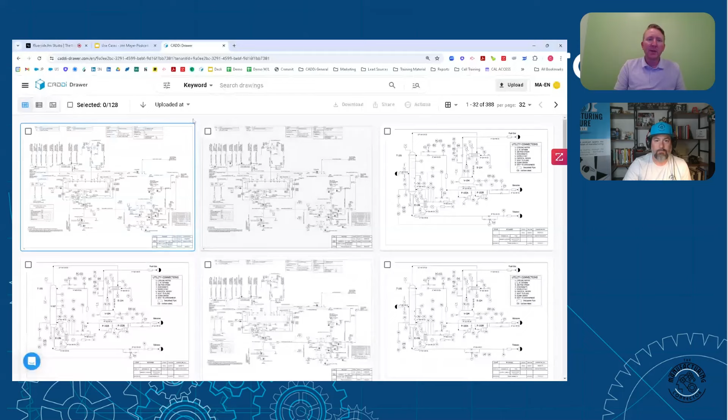First, I'm going to share my screen and go over to the CADDi Drawer application. This is what I mean by logging in and instantly seeing the parts you have designed, and the fact that we're really oriented around thumbnail views of the parts themselves. You see the shape instantly, right?

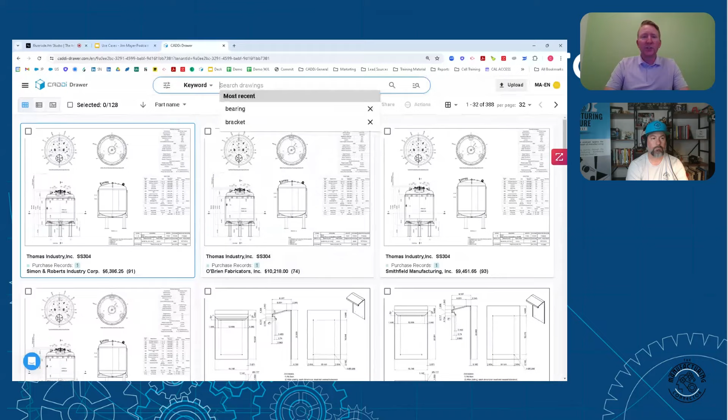First, I want to walk you through that keyword search I talked about. Let's just start searching for some keywords here. We're going to search 'bearing,' right? If you're lucky enough to have a PLM or PDM tool, a PDM tool could have found this part for you really quick. The part name is bearing, right?

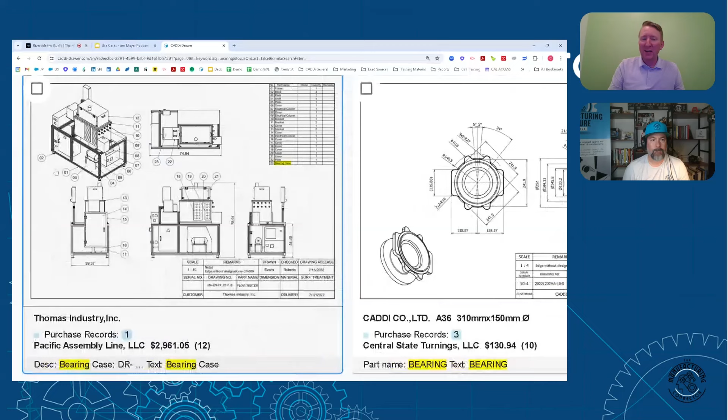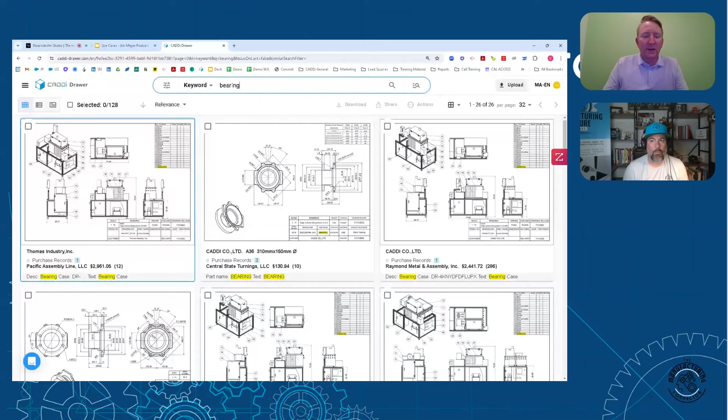But what it wouldn't have found is this assembly drawing — the bearing isn't described here at all, it's in the bill of materials. So now, wait a minute, part number XYZ from our suppliers is about to go end of life. I need to find that part number scattered throughout all our data in order to start replacing those parts across our assemblies before this product goes end of life.

We can even narrow that down further when we start tying these searches together. So we're looking for a bearing made out of A36 steel. Boom, now we've got three of them here, and look at those shapes. Wait a minute, this one in the middle of the screen is roughly what I'm about to start designing here. Does this work for me instead, right?

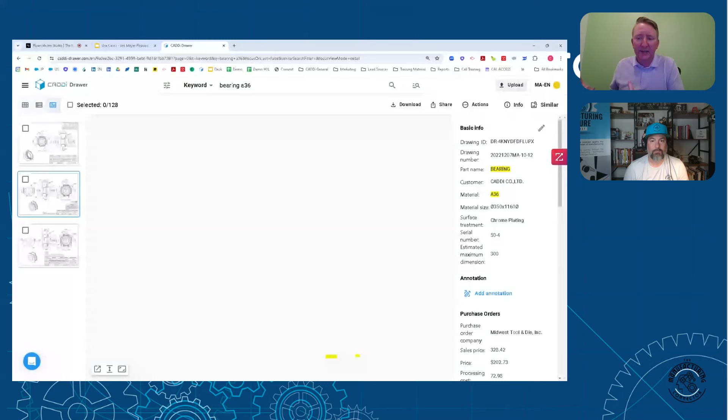That's one of those ways engineers use that tool — they're going in and searching for information that can be right at their fingertips rather than locked away in cabinets. We start looking at a bracket, for example, and our boss just walked by and said, hey, we've got too many different brackets on the shelf, go figure out which ones we can combine into a single part.

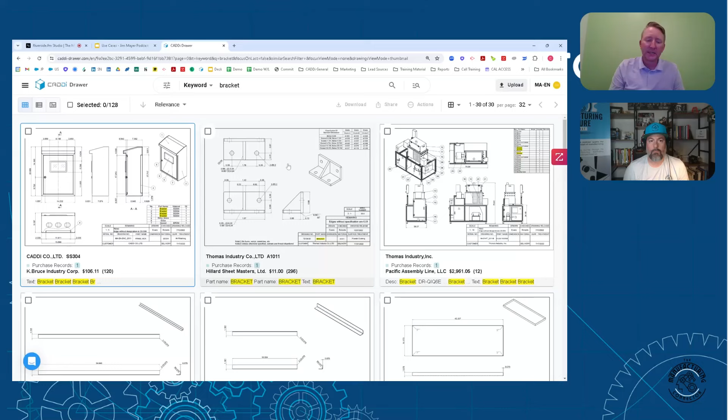So they'll go into the system and they'll find a bracket like the one we have here in the middle of the screen, and they'll go ahead and select it. This is where our similarity search tool comes in, in the upper right-hand corner. They click on that similar button, and within seconds it pulls forward all of those shapes that, based on the geometry inside of the part, are similar.

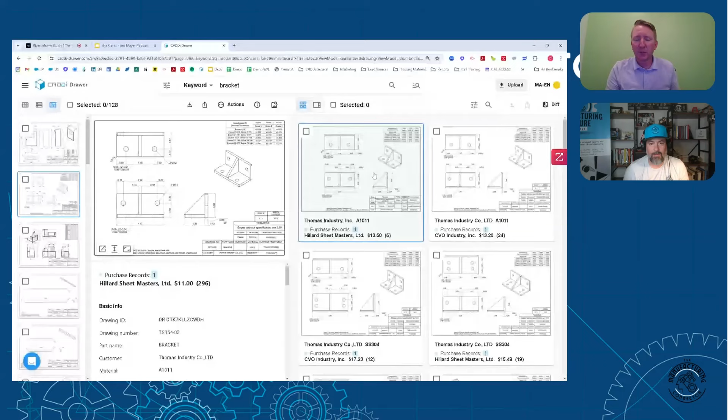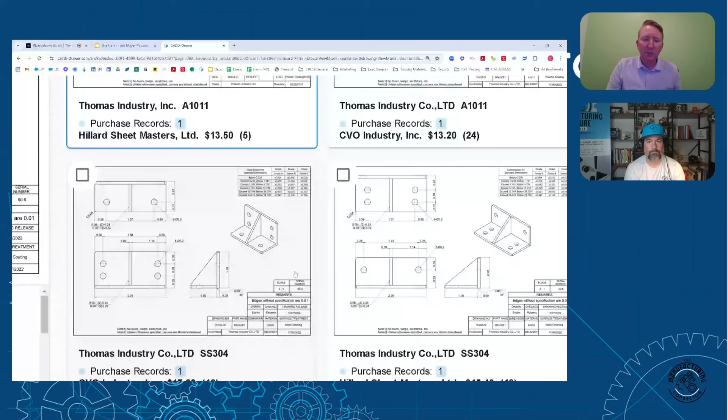They start thinking, wait a minute, these parts here, there's not much of a difference. Maybe little differences in where the holes are, a couple extra holes in this part, a couple extra holes in that part. They quickly realize, I'm going to go ahead and redesign the part to accommodate all of those mounting locations rather than these one-off mounting locations. I'll get 5 or 6 part numbers out of our system, stop taking up shelf space in our inventory room, and now purchasers can negotiate for 500 of this bracket per year rather than 100 of each of the 5 brackets before.

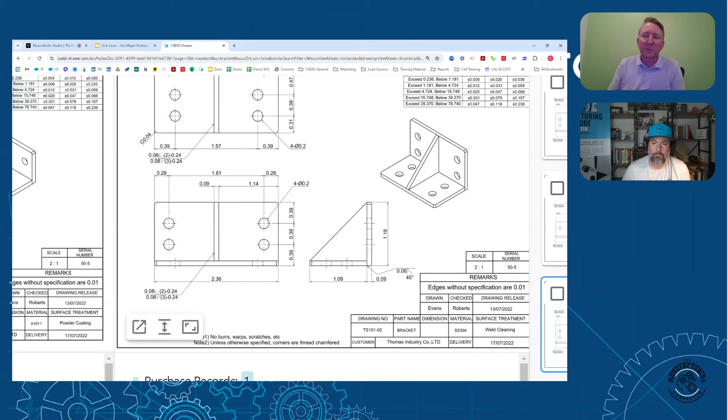And that should absolutely help save our organization money as well. So I hope that makes sense in regards to some of those engineering use cases.

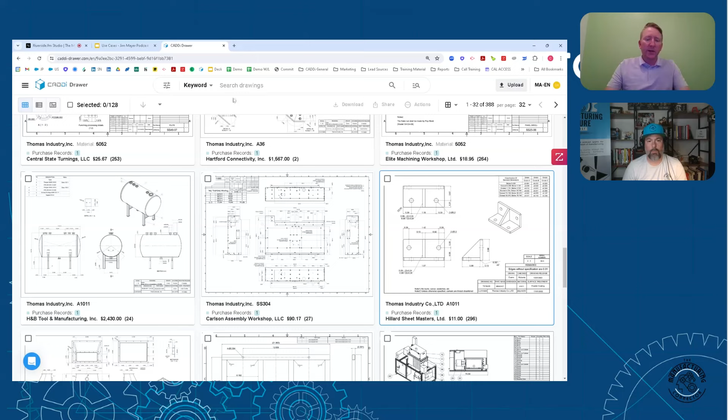I want to walk through for just a second a little bit of an advanced procurement use case here as well, using the same parts. So we're going to go ahead and search for that bearing again, and we're going to select this bearing in the middle of the screen.

If the audience can pretend with me for a second, the engineering team just walked over to my desk. I'm a buyer who's been in my role for just 2 weeks now, green behind the ears. I'm ready to tackle the world, but I don't know anything about our vendors at all, who performs well at what, and who doesn't perform well at other things.

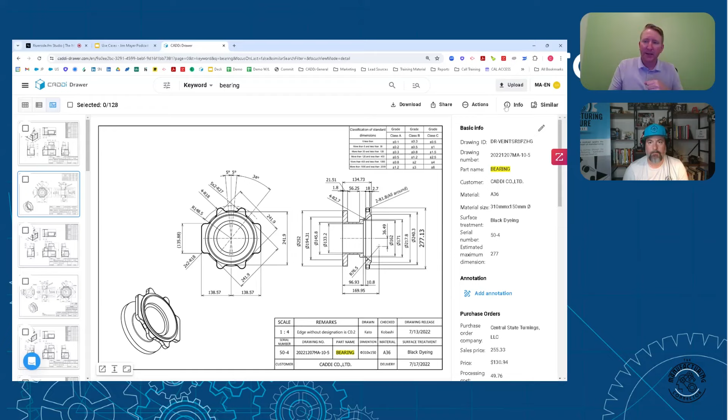So the first thing I'm going to do is allow the CADDi Drawer application to ingest that drawing. Then I'll go up to the upper right-hand corner of the screen again and click that similar button. When we set this up for buyers within their organization, we include in that thumbnail things like how many purchase orders have you written for that part in the past, where are you buying that part from, and how much are you spending per part over what quantities.

So a buyer who wants to move really, really quick can say to themselves, okay, Polaris Precision seems to be okay, Central State Turning seems to be okay, Midwest Tool and Die seems to be okay. I know that I can go ahead and send these parts to those particular shops for a request for quote.

But let's go one step further, because one of the things I've learned through my career is that the majority of people who start in a junior level buying role have a lot of aspirations to be on supply chain teams, solving complex problems and being hyper strategic within their organization. So they're going to go through and actually select these individual parts that they feel are the most similar in nature.

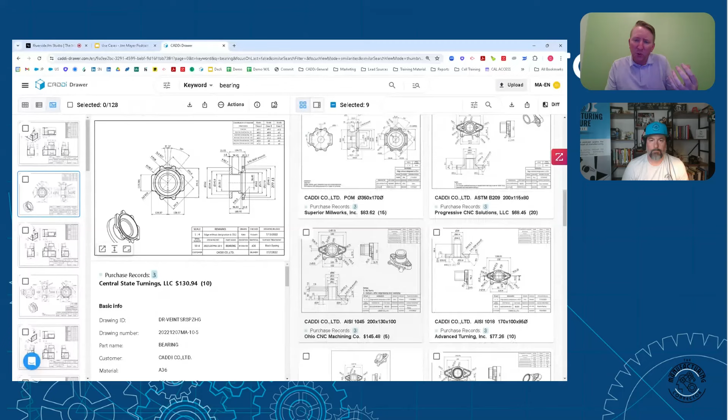We are strong believers here that this AI technology is there to empower people, not make decisions for them. So when we set this up, we did not choose an exclusion zone. As you scroll and scroll, they become less and less similar. You can kind of see the similarity—there's a hole through the center with some ears hanging off of it, with some mounting locations on it.

As a buyer, as long as I've got pictures of these parts in front of me, I'm smart enough to know where the similarity ends. And then I'm going to go up to the upper right-hand corner of my screen and click download, downloading all of the data that is behind those drawings inside of our systems.

What that looks like is a drawing very similar to the one I have here, whereby you have the data from your PLM system, the data from your manufacturing execution system, the data off of the drawing, the materials, the data from your procurement system all normalized, and data from your quality systems as well.

Your supplier scorecards and any type of defect reports. Instantly, if I'm an advanced user, I know, okay wait a minute, I'm getting some defective parts. What are those parts? Okay, good to know. Let's check on the supplier score there. Well, okay, it's a 71 supplier score compared to some 88s and some 94s for similar parts.

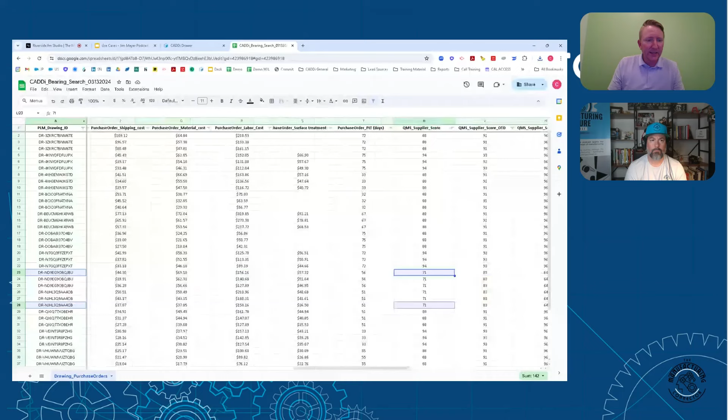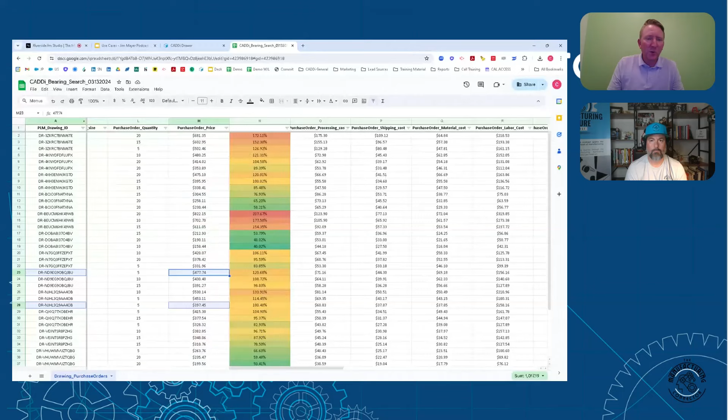Let's go look at the pricing here really quick. Okay, here's my pricing, it's right in the average of pricing that I'm receiving on this part from similar parts from this same supplier. Who is that supplier? I'm going to go all the way back over to the side here, oh I got that minimized. That's Raymond Metal and Assembly, and they seem to be making, these are two different parts for me, 3 orders on each of those 2 different parts.

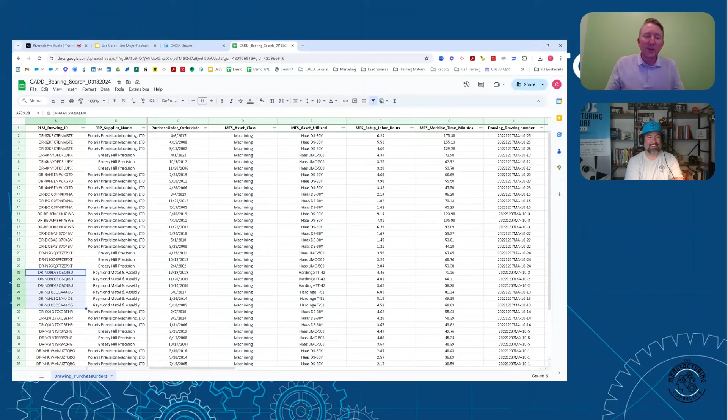I now know a few things. I know I'm not going to send that RFQ to Raymond Metal and Assembly, right? The next thing I'm going to do is I'm actually just going to go grab those 2 parts. I'm going to go back over here, I'm going to do a quick drawing ID search, I'm going to drop those 2 drawing IDs in here, I'm going to search for them.

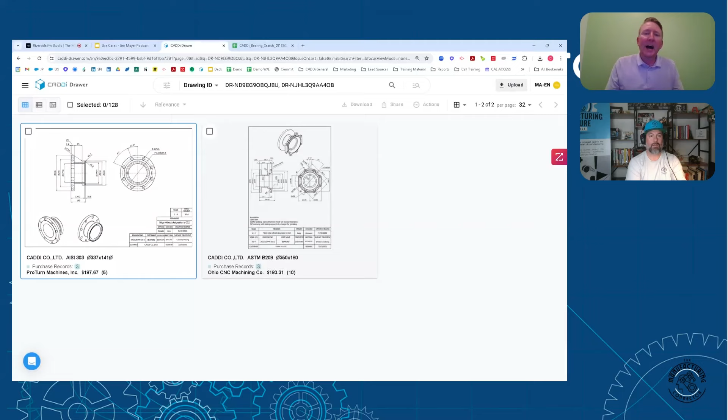Lo and behold, these 2 components are indeed very similar to the part that we're about to source. So what I'm going to do is I'm actually going to take and download these 2 drawings as well, and I'm going to send all 3 of the parts, the new part and the 2 existing parts, either to Breezy Hill Precision or Polaris Precision Machining.

And what I've just done there is I've given those 2 shops that are performing well more parts to quote. My economies of scale are going to go in my favor when I do that. I also just did a little bit of supplier consolidation. I'm taking a supplier away that is performing poorly, and therefore I'm increasing the quality across my entire supply chain by doing so. And I'm not sure of any other way that you would have been able to do that as fast as I just did here, Jim.

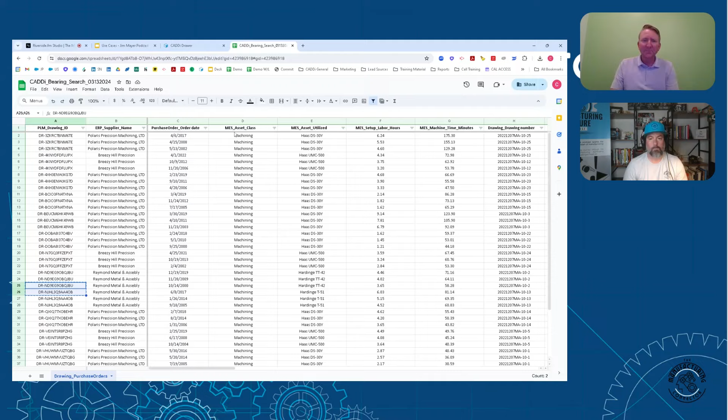No, not even a little bit. I mean, granted Chris, this is your job, you know this software better than probably 90% of the people out there. But it was, and I use this with all love and due respect, that was stupidly simple. It was stupidly simple how easy it was for you to find that information. They followed the primary rule of engineering when they set this system up. Keep it simple, stupid. Yep, absolutely. I am blown away. And this is from somebody who's seen a demo already of CADDi, but it wasn't like this, it wasn't this in depth. This is amazing man, I'm really impressed.

So when you are doing this demo Chris, what is the most common question that you are asked, or your sales team is asked? You guys serve so many different roles that you can pick your favorite, but what is that most common question that you guys get?

Yeah, I think there's 2 most common questions that we get that are really really interesting, my favorite ways to reply to them as well. It's, and I talked a little bit about it earlier, how fast can you show me value? We do have 1 or 2 competitors out there, they're big massive software organizations, if you're in the industry you're familiar with those names. And what I've heard is sometimes those implementations are 2 years and the licenses are $2 million. And they don't have time to wait for that, they've heard the pitches from these big companies in the past. And I kind of like to call ourselves the 90-10 version of it: 90% of the features, 10% of the cost, 10% of the implementation time. That's a fun way of describing that and responding to that.